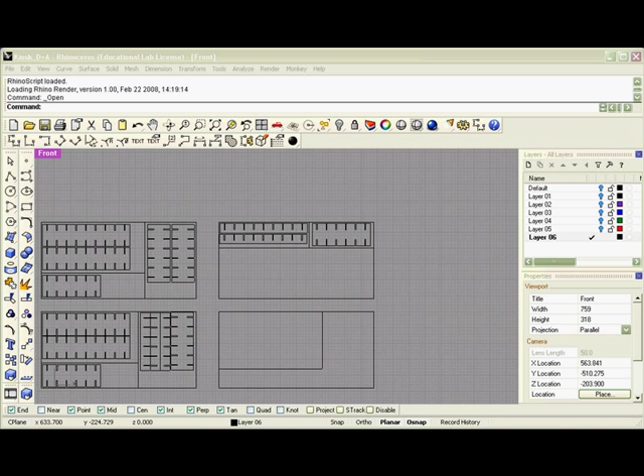The first thing I've done here is open up a file that I'm going to be laser cutting. You have all your laser cut stuff organized and scaled to the proper scale you want to cut at. The first thing you want to make sure when laser cutting out of Rhino is that your units are set to the right setting.

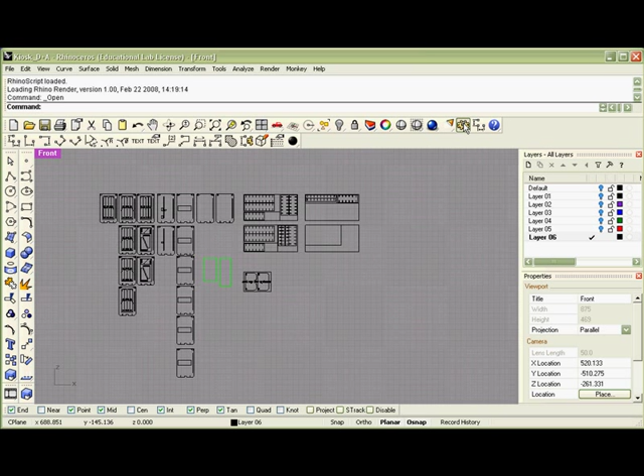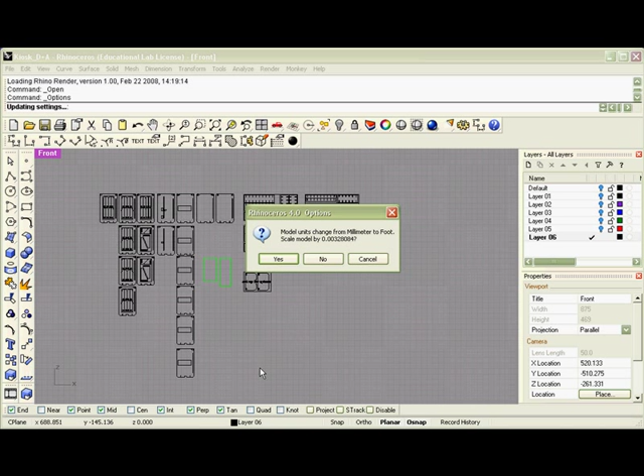So I'll come over here into document properties and set the units. You can see they're set in millimeters, and I need this set to inches since the laser cutter reads inches. As a precautionary measure I'll beef that up, which usually makes Rhino run a bit more precise and accurately. I do not want to scale this, since I want a one-to-one translation, as I've already been modeling all this.

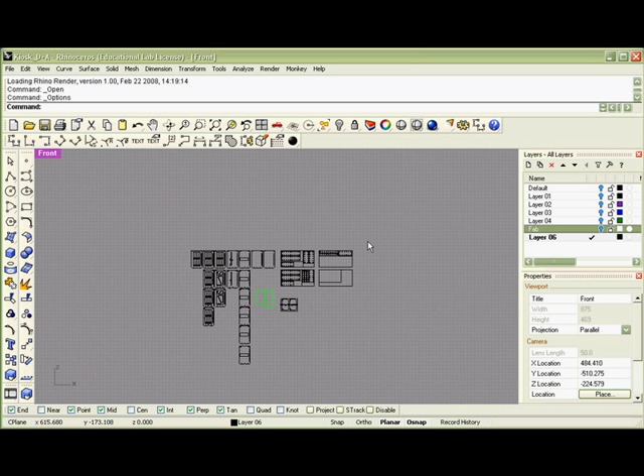Now that our model is in the right unit setting, we can start setting up the fabrication sheets. I'm going to create a layer called Fab and change the layer settings to white. The reason is each of these lines is set to a certain layer, the display color is by layer, and the print color is also by layer.

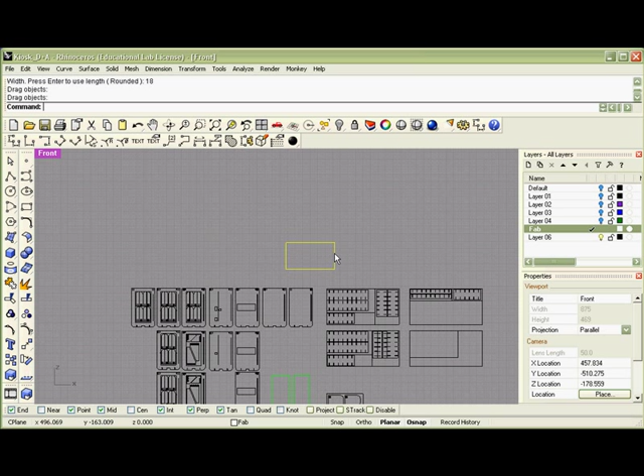So if I set this to white and draw a 32 by 18 box, which is the size of the bed of a laser cutter, you'll notice it's white and will print white. I don't have to worry about it printing this box because it's not one of the registered colors for the laser cutter. So now I'm ready to place one of these into the laser cutting window. I'll grab this, copy it.

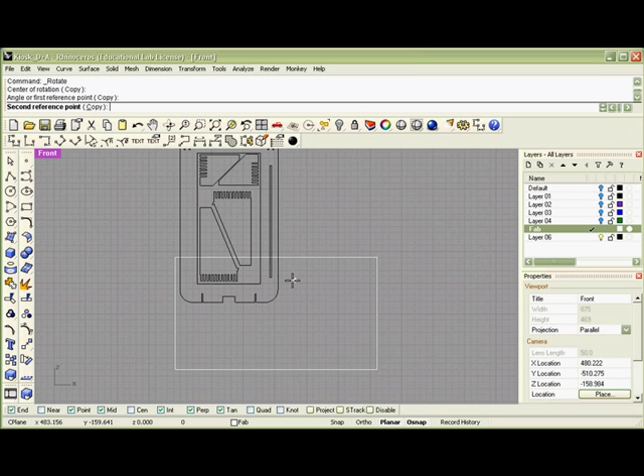I'm going to rotate this in. You'll notice I have certain snaps on—you can do a step over an inch at a time and other things like that, but we're not necessarily going into that. I do have my object snaps on, which are important. I usually use end, mid, intersect, etc. These are just good to have on.

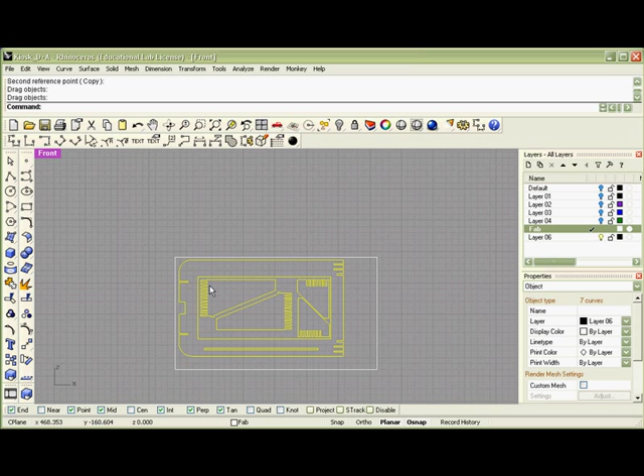Now when I place the stuff I want to laser cut into this sheet size, we push it out about a quarter inch off the sheet size. The reason is the bed of the laser cutter isn't actually attached to the laser cutter itself, so you can remove it. That allows you to put larger materials in, but it also means you can't always count on it being exactly in the right spot. So we need some offcut allotted for that to make sure everything gets laser cut the way we want it.

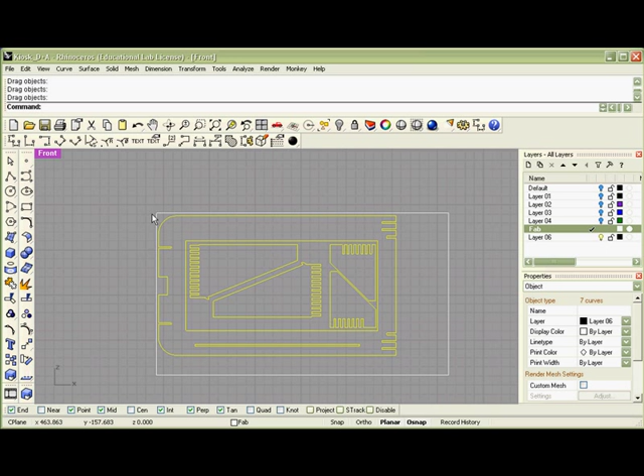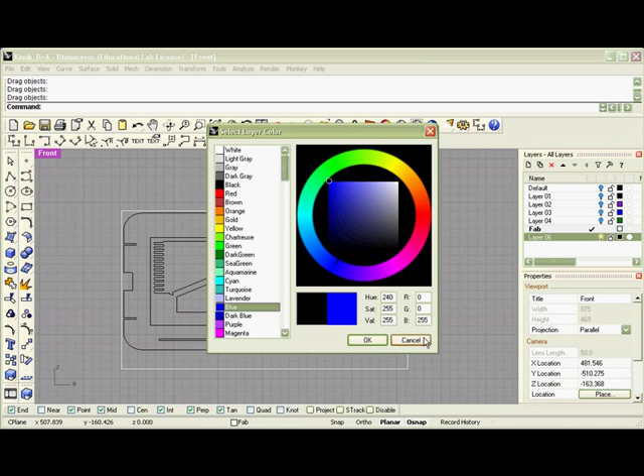Now we've got this nicely organized into a nested sheet, set to layer 6. Notice you can come in here and set this to any color—red, blue—and if you notice the RGB values are 0, 0, 255, which is important because it typically reads those solid values the best. Green is also 255.

Now I'm ready to do the print. I'll do Control P, and you see the X660 pops up as the destination printer. The laser cutter is actually just a glorified printer—it reads vector lines just like any other printer would, except its output is a little different.

The first thing we need to do here is make sure our page size is right. This looks right, but let's double check—go into Properties, the engraving field. Now we look, it's in inches, the width is 32 by 18, so this is actually correct. If this is all out of whack when you come in here, you just want to maximize the page size, and it'll reset these values to the specs for the machine. Click OK. So now we know this is the right size and everything.

So now we want to come down here and scroll down to the View and Output Scale. Now, the first thing I want to cover in this is the scale right here. You have 1:1, and that's exactly what you want. Another thing that commonly happens is scale to fit, and I'll show you what happens when you do that.

But we want to either do one of two things here. We want to draw a new window, or we want to move a window. And what we want to do is draw a new window. So we're going to take this, and you'll notice that it's scaling to the proper size for this. But what we want to do is just come in here, and we've already drawn this so we know this is accurate. So we can come in and click on that, and then we just press enter, and we're good. And you can see that this updated with the cuts in the proper location.

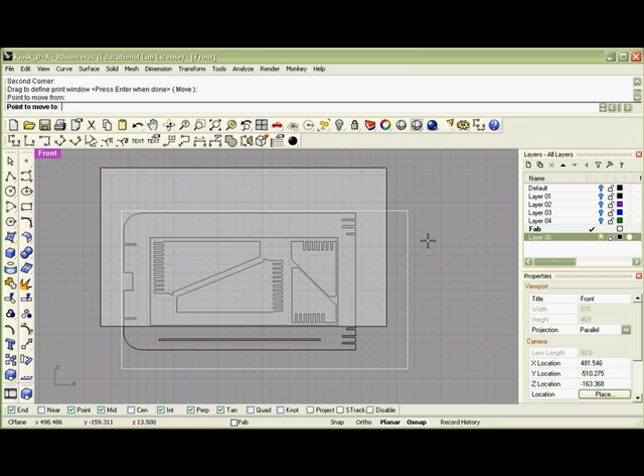Okay. Now we can take this and move this somewhere else, and we can just take that and move that back because we know that's where it's at. Now the scale to fit, we need to come down here, and you can see that this looks absolutely right. Everything looks appropriately placed. And then if we go down here to 1 to 1, oh, what happened? No, this is 1 to 1.

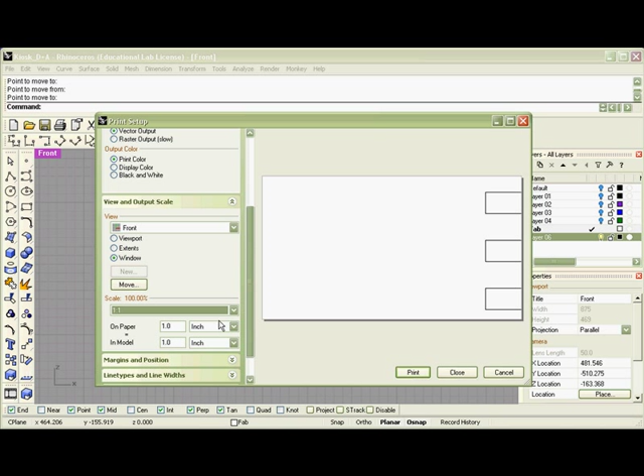Oh, you see, I made a mistake here. I set the units wrong, and we'll go in here. We know we don't want to do that. We want to go back and Control P, and there it is. So, all right. So now here we'll just go back. If we do a scale to fit, you can see that it offsets everything in just slightly and adds margins, which we don't want. So we want this to be 1 to 1.

Okay, and so now that we've got this all set, 1 to 1, we're in the right viewport, we have the window in the right place, and we want to go and do a properties. We are ready to set the laser cutter settings for this job. Now, this job was cut out of 1/4" acrylic, and it's important to understand that there are 3 laser cutters in the university, and each one of these has unique value sets depending on the material. I'm going to be using the super speed, so I can set this to run a little bit faster than on the other machines in the university.

Now, you'll notice here that this is all set to skip. Sometimes they're set like raster, vector, or raster, or just vector. And it's important that when you're not using these colors, you have them off, just in case you have floating lines or hidden lines somewhere that you're not aware of, and you don't want the printer to accidentally pick those things up. So that's just a precautionary measure.

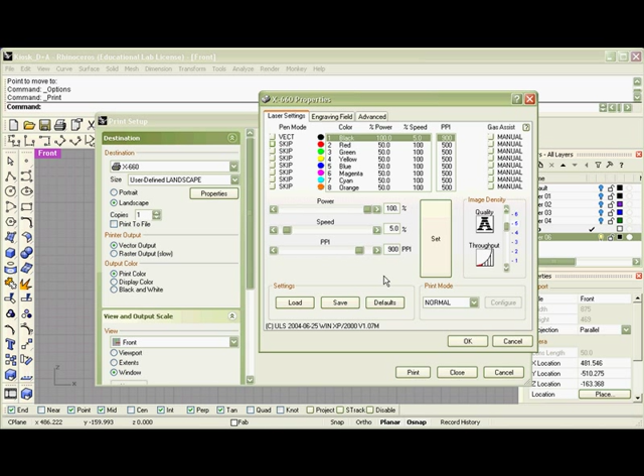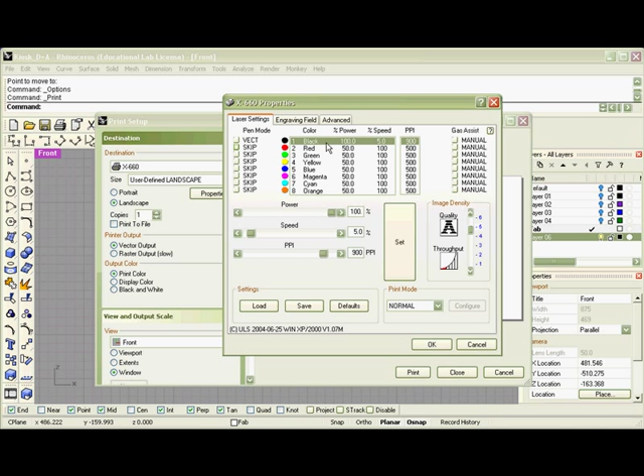Okay, so we've got this set to vector, which is what we were going to do. If you want to do rastering areas and stuff like that, I'll cover that in a different tutorial. But just be aware that Rhinoceros is probably best for doing laser cutting. And if you're doing raster areas like images, you probably want to do that in Adobe Illustrator. Alright, so we click OK.

And we've got our settings set. Everything looks right in the screen. We're 1 to 1. And we're ready to send this off to the printer or the laser cutter. Alright, so we just click print. And it's off. And that's it.